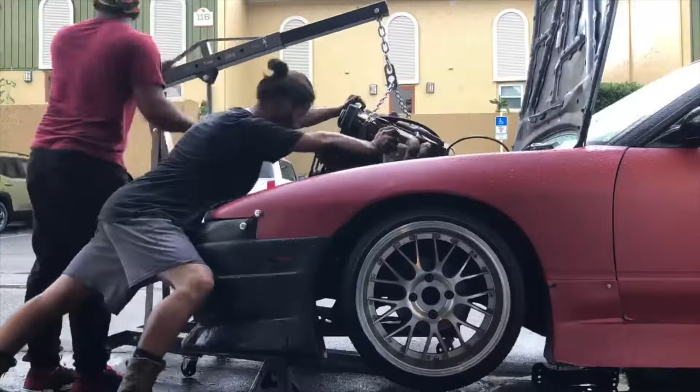You guys can tell the Jeep is behind me and we are at my shop, but I want to start the video off by apologizing again for the exposure issue in my last upload. I was filming a few clips on my iPhone, and for whatever reason it came out gnarly. That brightness was so weird, and it did it in my editing software, but I wasn't sure if it was just a rendering issue until I uploaded it and saw it was all janked up. So I apologize about that.

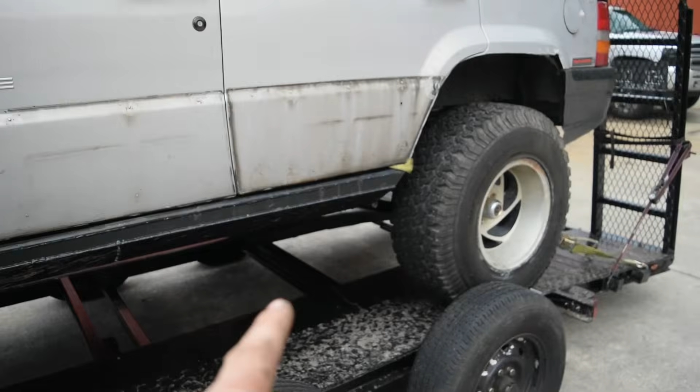I'm going to throw in a couple clips real quick of me working on the rock sliders for the Jeep. It's going to jump back to me at the house, and it won't have the tires on it, but I want to show the clips I filmed of me welding the rock slider plating on, and I went ahead and 45'd these edges. I traced out my cardboard template that I'm going to lay over these to cap the rock sliders. So it's going to jump to those clips real quick, then back to me in the shop where I'll show you guys the cutouts, transfer those to the computer, get them drawn up in CAD, and then get them cut on the table. Here's those clips real quick.

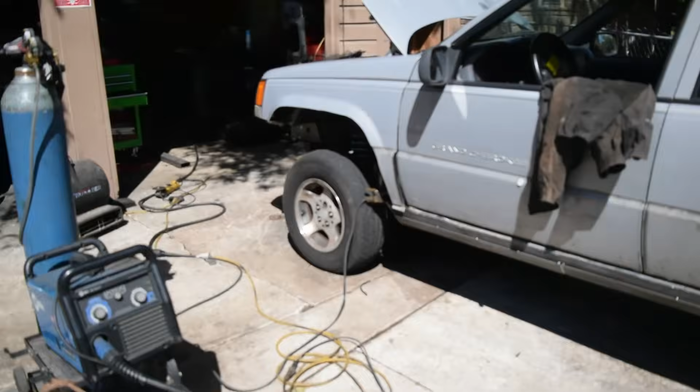Alright guys, we're back out here yet again working on the Jeep. We've got my girlfriend out here cleaning up all the camping stuff. We're prepping for Uwharrie. I know it's only about a month away, four weeks, but that time's going to fly right by, so we're doing all that we can. I wanted to bring this footage to you guys.

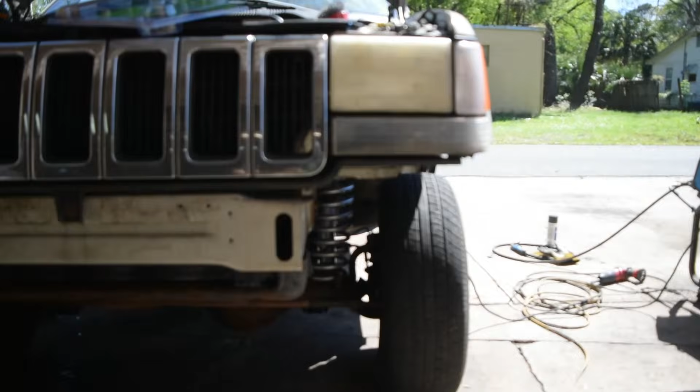These are the beauty plates, or the rock slider plates, that I'm doing for this build. I've got these all tacked up, and I wanted to check in with you guys and show you this process before I just started welding them out. I've also gone ahead and cut off this side of the Jeep, as you can see. We're going to need to remove that side, weld this stuff up, and then from there it'll be lightly sanding down everything, prepping it to lay down some black paint. I'll probably do the same body line up across the doors, and then paint it black from there on down.

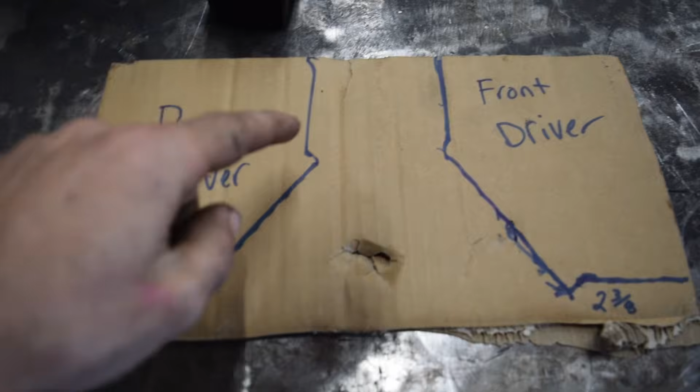I've got my cardboard templates behind me, let me show you guys real quick. These are for the driver's side. This is the rear cap, and then this is my front cap here. And I've got my measurements just marked out to calibrate my drawing in Fusion 360.

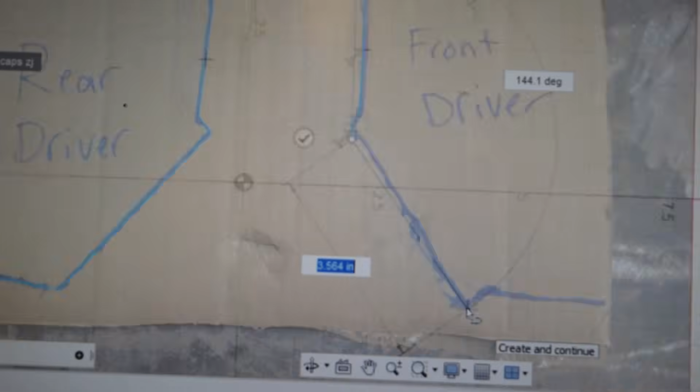There's a ton of videos and stuff online that will explain all of this to you, so I'm not really going to go into detail, I'm just showing you guys how I'm drawing these out. Essentially what I do is put this photo into Fusion 360, then calibrate the photo with a measurement I've taken on one of these cutouts or drawings, and then I simply trace it out in my program, which gives me two separate items, as you guys can see here.

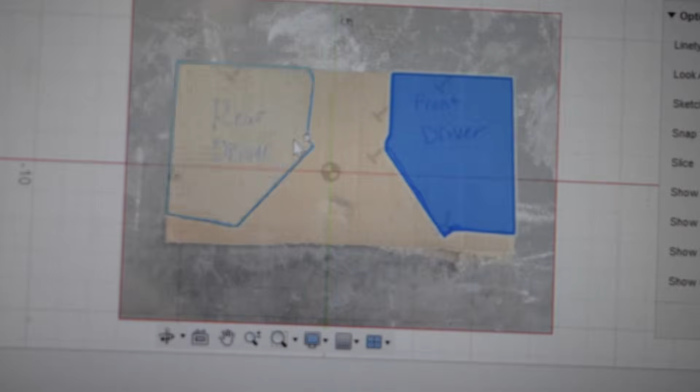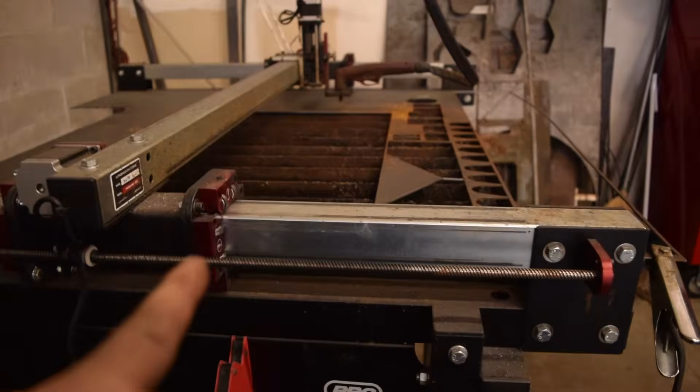So this will just make my life easier when I go to put this into SheetCAM, write my G code for it, and then put it out onto the table. Once it's out on the table and it's cut out, I can just grind to fit, and this just makes everything so much easier.

So I'm gonna finish out these guys. As you can see, they're almost done. I've got to go ahead and save the drawing, get it into SheetCAM, and do my contour lines. And once all of that's squared away, I can write my G code, and we will get to cutting this.

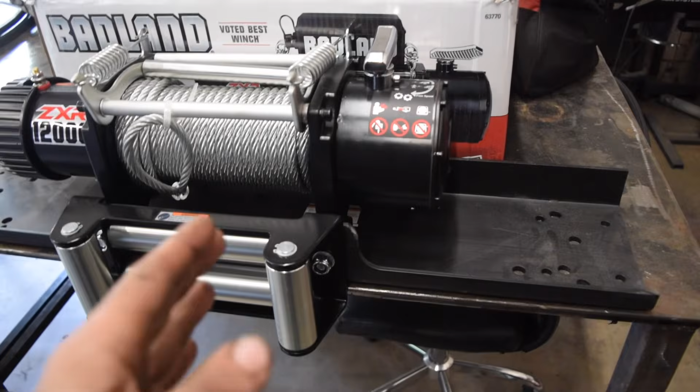And then from there, once we get these guys cut out, hopefully I'll have some time to start working on this. I really want to get the rock sliders capped off and then turn my attention to this, but I was really hoping to get something drawn up today and at least starting to cut material and getting it prepped up, because I want to take the Jeep home this weekend so that way I can continue doing the rest of the work. I also need to weld the diff this weekend because URE is literally like 2.5 weeks away. So I've got a lot to do in a short amount of time, so let's get to it.

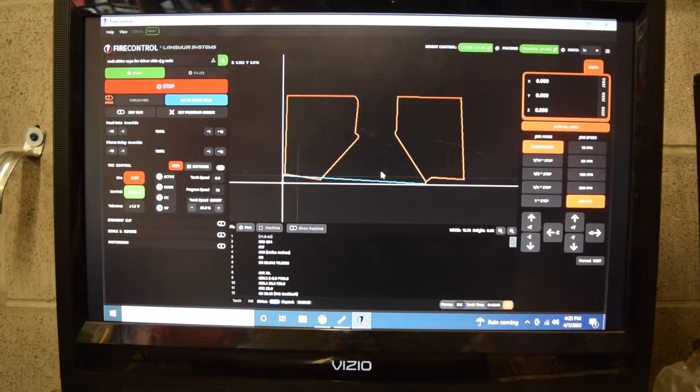Alright guys, so as you saw, we've got our drawings in FireControl now, and the table is ready to rip. I'm going to do a quick dry run real quick to make sure that my plate positioning is correct. So I've got her on dry run, and we're just checking on this first cut.

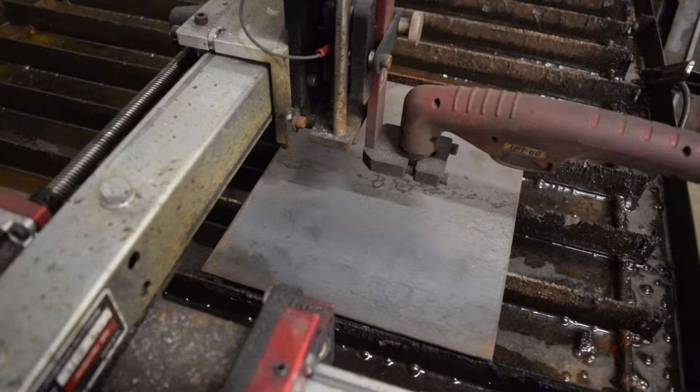Now I would let the second cut run, but since my plate is small, I'm going to stop it when it travels over to the second plate that it's supposed to cut, and I'm going to restart my G code at that point in time.

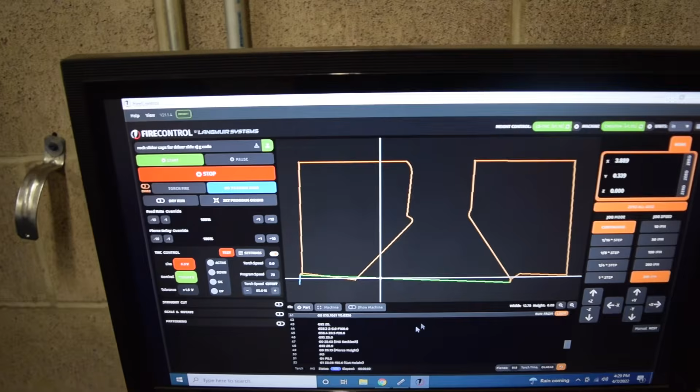So if I click here, it will give me the option, let me turn off my dry run, click here, it will give me the option to run from the line, or if I click here on my actual lead-in, you guys can see where she will start her cut. Right here, I can generate from that line, and now we are cutting just the second one by itself. And if I want to go back to it, I can just, whoop, there we go, both plates.

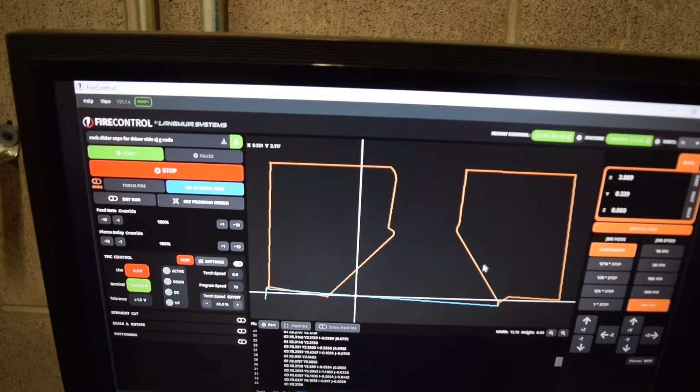So I'm going to rip out the first one real quick. I'll show you guys that one, and then we'll cut out the second one. And I don't think I'm going to be able to do any welding today because we have a storm moving in, and it's moving in quick. I was hoping I'd be able to get some work done, but what I may end up doing now is just cutting out the plates and then starting to draw up for the actual bumper itself.

I'm going to get my dimensions. I've already taken 2 photos of the frame rail, so I may draw those up in CAD. We may go through that process, and I'll make this a multi-part video. But let me shut up, let's get cutting real quick, and we'll move forward.

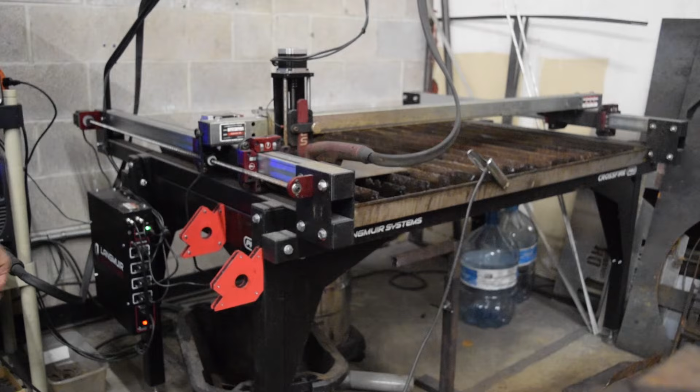Alright guys, so we are set up for the second cut. I'm going to go ahead and turn off the dry run feature. That's my torch height control system there, but we won't be using that right now because I'm not doing any in-depth cutting right now. We're just cutting a straightforward piece here, but we'll go ahead and hit the start button.

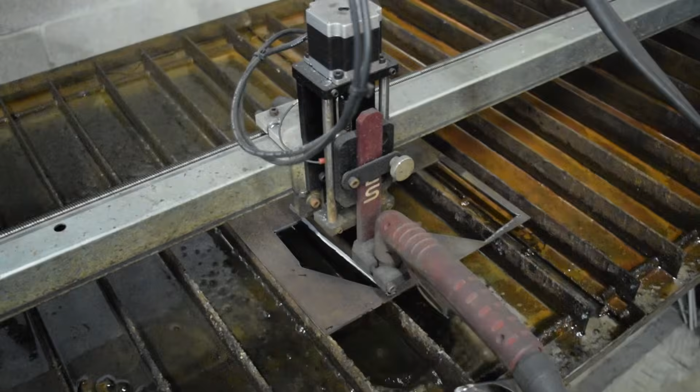Voila. Go ahead and close the program here. Move my torch head. Magnet. There we have it.

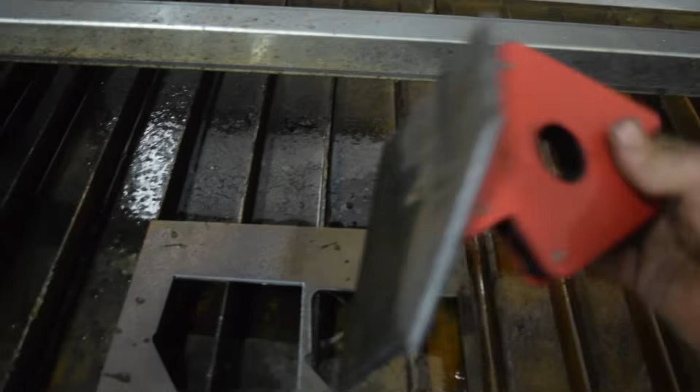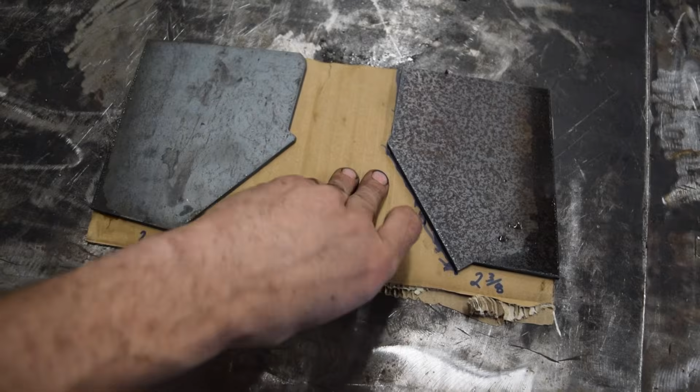Let that cool off for just one quick second before I go touching it, and I'll show you guys on the cardboard templates. Alright, as you guys can see, I've got them laid out on my cardboard template. If I just slide them down, we have my caps. I'm going to get these deburred and cleaned up, and then we will turn our attention to drawing the bumper plates on my CAD computer here.

Or excuse me, the frame rail plates for the bumper. Get those drawn up. I'll show you my process there, and we can try to get some plates cut out today for that.

Alright, so that storm definitely hit us good. While this is drying off, I'm not sure if I'm going to have time to do any work today aside from drawing and maybe doing some cutting on the table, but I'm going to have to do a lot of measuring on the Jeep.

Go ahead and set up for my CAD work. So my basic idea is on my phone here, you guys can see that I've emailed myself.

Sorry, the focus was terrible there. I'm not really good at doing this kind of stuff here. I'm trying to get better about this YouTube thing, dude. I'm so awful. Anyways, pull up Fusion 360.

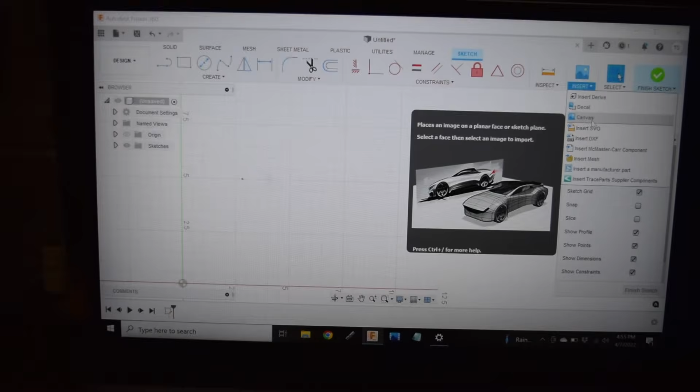I go ahead and insert a canvas, and I already have these photos emailed to me. So here is the driver side of the frame. Select that and move the photo over here, and I'll zoom in. It'll make more sense to you guys.

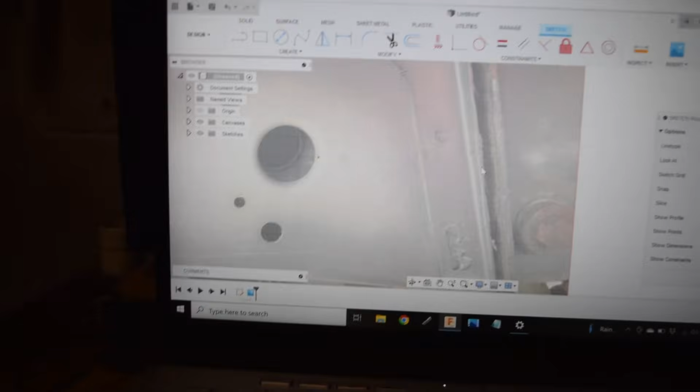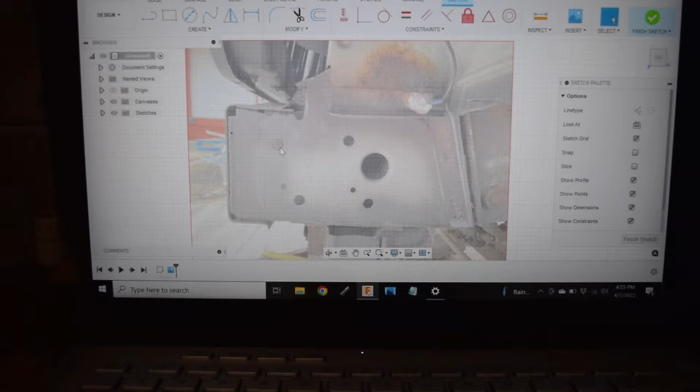So here is the side of my ZJ frame, and what we need to accomplish is making a plate that can sit here on the actual frame rail itself, or the unibody, and something that I can put a couple through bolts here on the chassis, maybe one here. I'm not quite sure what I'll do with that large hole, but I believe these guys are 1/2 inch, so I'll do some 5/8 holes or something on my plate, get some 1/2 inch hardware, slip them through, and then maybe do another plate on the back side with some nuts.

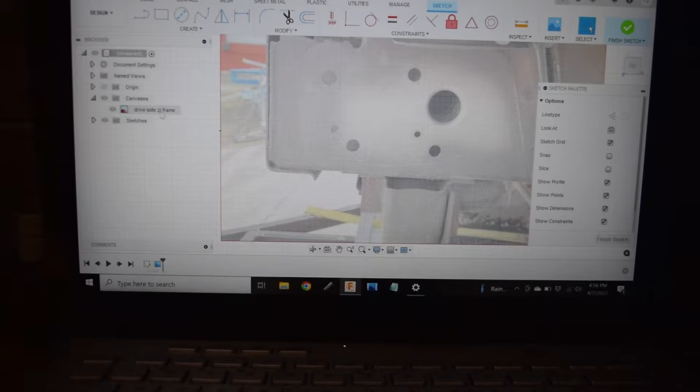I'm not going to show you guys this whole spiel here, but basically what I do is go to my canvas drop down menu, then go to calibrate, and this will allow me to go to, say, this hole. I believe the actual hole itself is 1/2 inch, so we'll put that in there and press enter, and then bam, our photo was just scaled off of that one measurement.

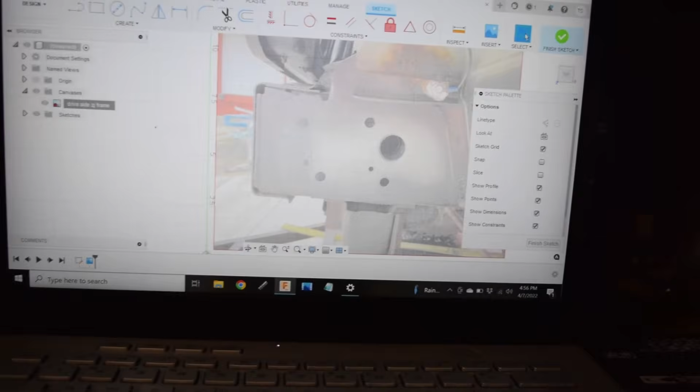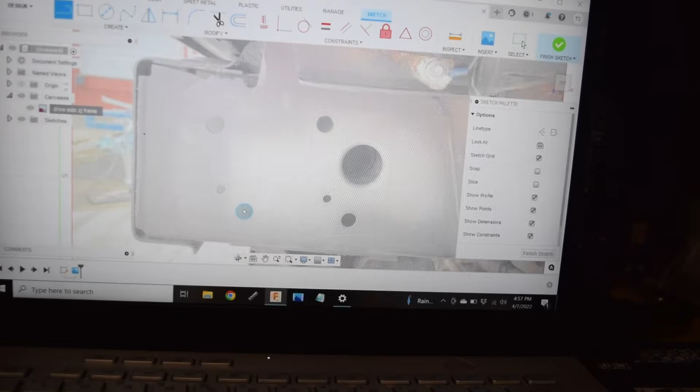So in theory, when I do create a 2-point circle and come down to that same hole, put the outside edge there and come down here, it should be - yep - 1/2 inch. So I go through and select all of those lines, those circles, and do a rough sketch. We'll say we want to meet back here, come down parallel with this guy, place this out, and we need to figure out from this distance here on the end how far I want to protrude and how I want to do a D-ring setup.

Now I'm probably going to be using some 1/4 inch plate to weld this bumper up, along with the actual winch plate that I bought at Harbor Freight. So with all of that, my 1/2 inch plate here, right behind my rack, and this guy should be able to make a decent little stubby bumper that I can mount this guy up to on the front of the Jeep, and will obviously enclose the front.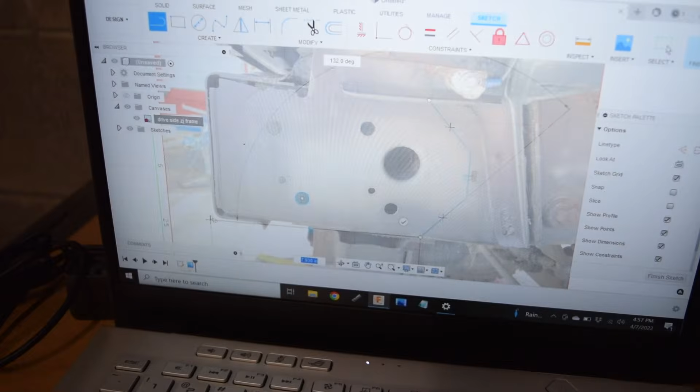Let me go show you the front of the Jeep real quick, and this will make a little bit more sense, but that is my basic idea on how I'm going to draw these frame plates. And then yeah, we'll step outside and I'll explain a little bit more in detail.

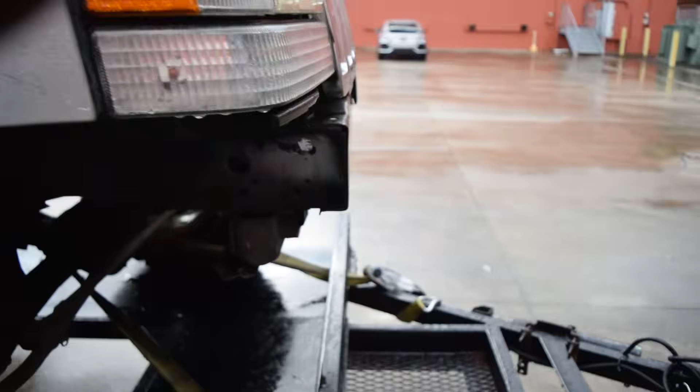Alright, now that we're outside, here's the ZJ. What I need to figure out now is how far I need to come out for the actual winch. So I'm going to go in there and measure the distance of that winch plate. That'll give me my overall measurement, a rough estimate, and then I want to come down and make a small curve to where I can mount 2 D-rings.

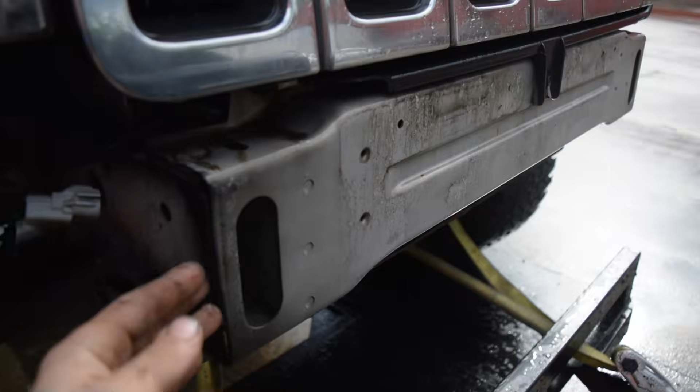Now I know the 1/4 inch plate, it's probably not the best idea to be pulling or tugging on there with small D-rings, but it's mainly just to hook up my winch, and if worst case scenario I need to be winched out, I can hook 2 straps to the front of it and connect to 1 winch cable, and then yeah, we could be good from there. But basically what I want to do is just come out the length of the actual winch plate, mount the winch right here in the front. Don't worry about cutting the grill or any of that nonsense.

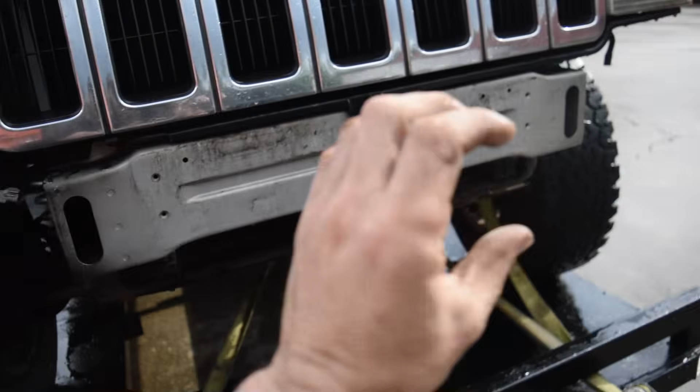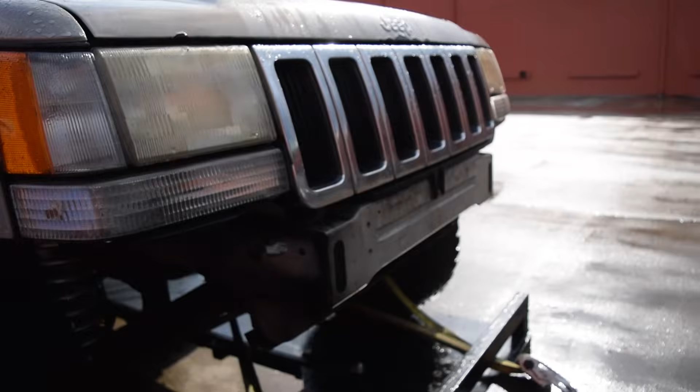I'll plate the front of it, have a fair lead right here, two D-rings on either side, and then with the bender inside the shop, I'll go ahead and bend up probably just a cheesy Schedule 40 or Schedule 80 stinger, because I don't have the money for DOM in the budget right now, and I want to be able to make it all the way up there.

Obviously I've got to fuel this thing for five dollars a gallon, absolutely trash, but there's my boss man. You out of here? Alrighty guys, so I apologize about that. That's my boss, he was trying to give me my paycheck, and we had to talk about a few things happening tomorrow, because I'm probably going up to Virginia Beach next week for a big contract and a meeting.

I had to work this past Sunday, so things have been kind of shambled, and I'm trying to fit all this stuff in before my trip. Anyways guys, enough rambling, let me talk to you about what I had planned, everything I was explaining outside on the Jeep. I'll run you through it real quick.

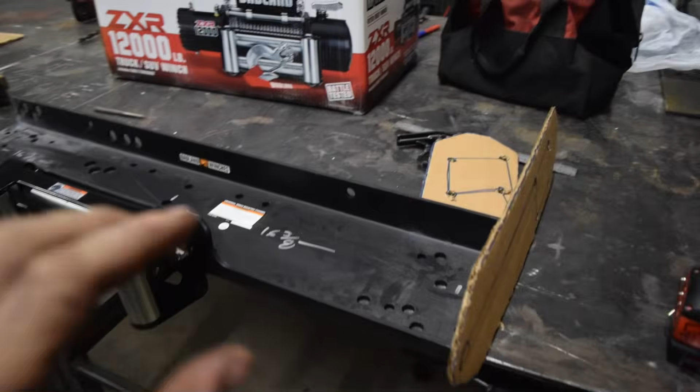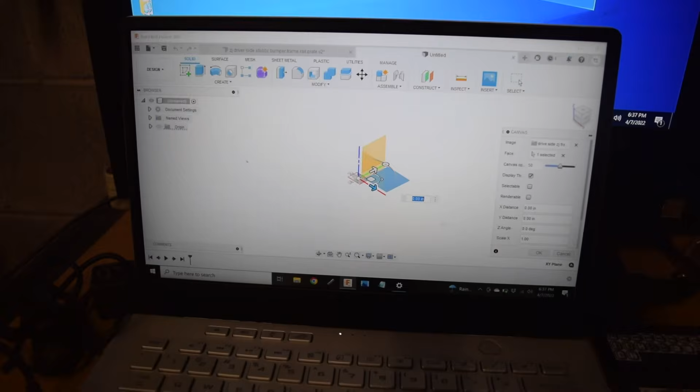This is a rough drawing that I have of a frame plate. All I did was take a photo of the inside of the actual chassis. I showed you guys earlier how I do my basic stuff with cardboard.

You can see here, adjust the scale here, go back to my origin, move this. So what I've done is taken this photo here, and drew out on the face of it this plate.

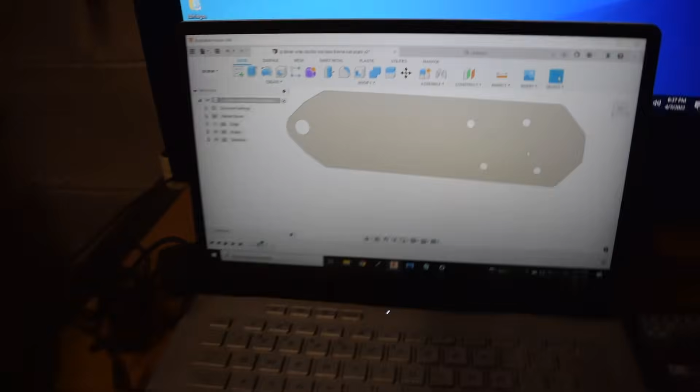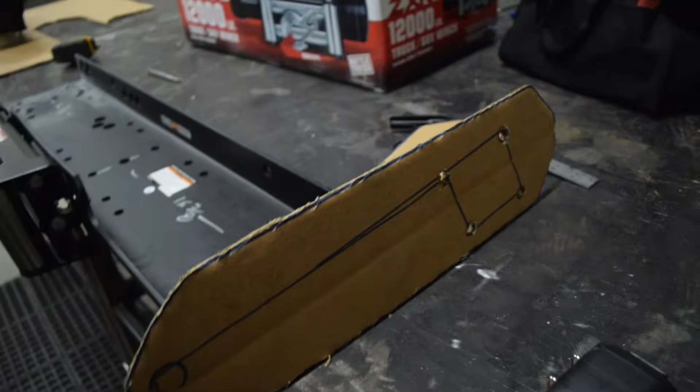From there I MacGyvered my torch head on my plasma table to do a drawing with a Sharpie, then cut those two out and laid them out right here. I fit this up against the outside of the unibody and it fits good, the holes line up. I'll have to trim along the top side a little bit, it rubs into a spot where it ties in, but this is the basic idea.

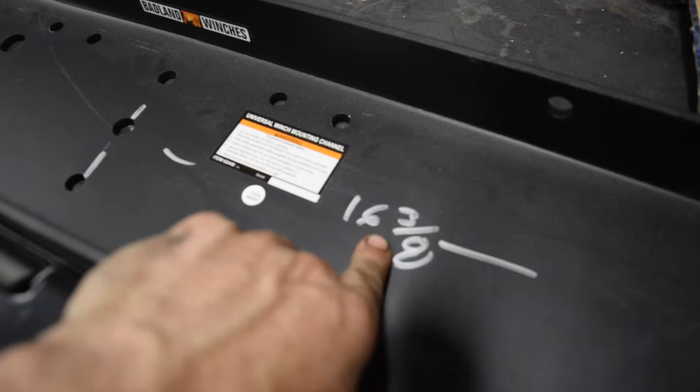This is the frame plate, or winch plate, the universal one from Harbor Freight. This guy will sit here, and you can see my measurement here, this is for the entire width of my Jeep, from this distance to this distance, that's the width of the Jeep. I split that difference up and scribed the line on center for this guy, that's where I'm going to be cutting. So just imagine that's cut off and this plate's sitting right here.

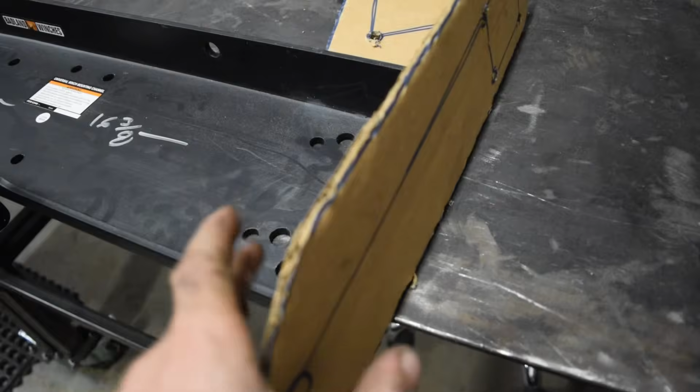This will sit roughly in that area. Obviously this is the face of the Jeep, the winch will sit here, this is the unirail of the Jeep. This plate I cut too big, I drew it too large in my drawing. Either I have to cut inside of the unirail to get this to fit, or I don't know, I may just weld this to my actual Jeep.

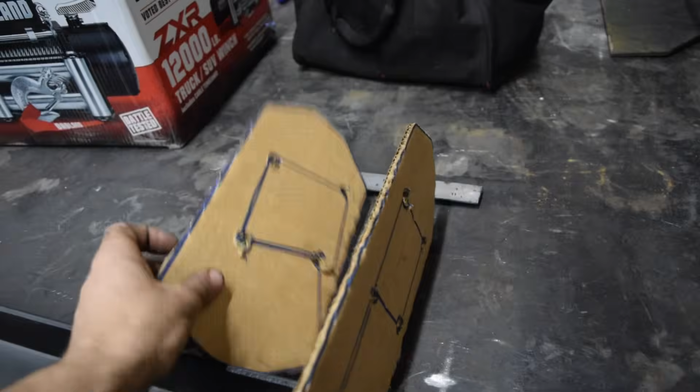I really want to get a kit made so I can put it on my website, and anybody watching this with a ZJ could just buy this winch plate at your local Harbor Freight and these two plates from me, something I could cut out and send to you that you can burn in yourself. Or this is something I can start producing in-house.

I can pick up a couple of these plates and weld these up for you guys, make up a jig and send them out. But either way, the inside of the unirail has a little slit, and this won't fit, so I need to trim this down and make a plate where this can bolt to, so it'll sandwich into the unirail. For mine though, I may just end up welding it, or I may get the kit figured out and go from there, but that's the idea of it. Once that's all squared away, that's what I want to do.

The rain's been on and off, the sun is back out there, but I'm not sure if I want to go back out, drag the welder and all my extension cords, and then have it rain again. So I know I'm rambling and talking a lot, but I'm just trying to come up with the content here to show you guys what's happening with the Jeep.

Let me show you guys real quick on the Fusion 360. Actually, let me just step outside real quick, one second.

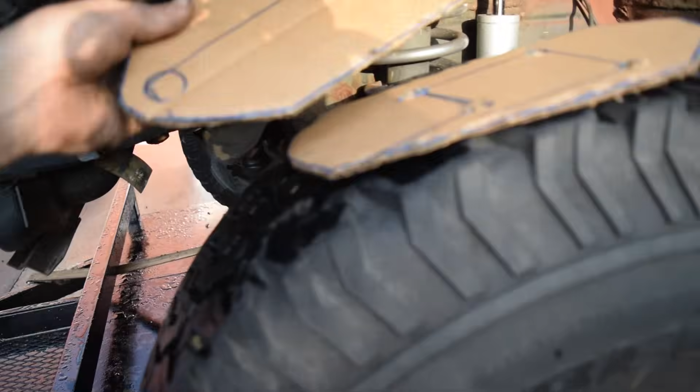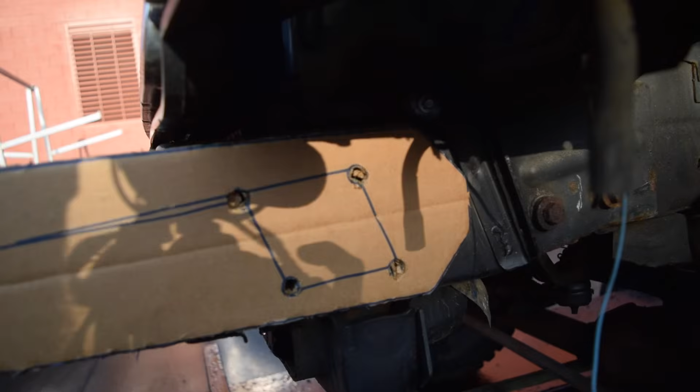Okay, so we're back outside with the Jeep. This will make a little more sense for some of you guys here. Obviously this would be sitting in these 4 holes right there. See that weld right there, or this overlay where the 2 panels meet? This is why I have to trim this upper plate down. So just think of it as that not being there. The holes are all lined up there. This guy will protrude there. The D-ring will be hanging where my thumb is, and then the winch plate will sit in here, and I'll probably bolt the back side of the winch plate.

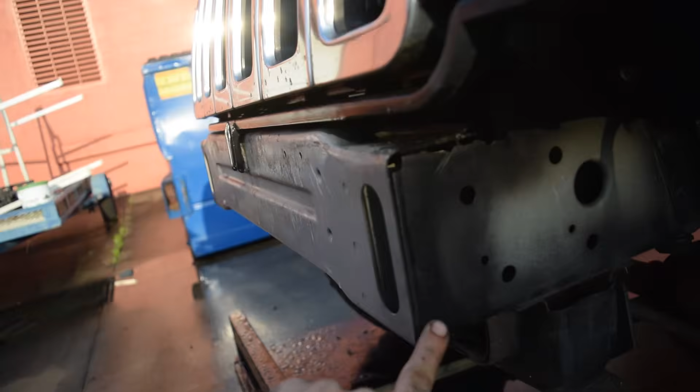In my case, I'm probably going to weld it, to be 100% honest with you. But if I make it a kit, I'll make it so that you can bolt it to the back side. I don't know if I'm going to be able to make any plates for back there, but you could rivnut that and then place a couple tack welds if you wanted to. I don't know how I feel about these 4 bolts holding my winch. Even though they'll be plated through here, all of this will be welded up, and the plate will be over it. I think I'm just going to stick it on here and burn it in myself as is, and make it so the winch is removable, with a small V plate on the face of it, like a rock or skid plate, whatever you want to call it.

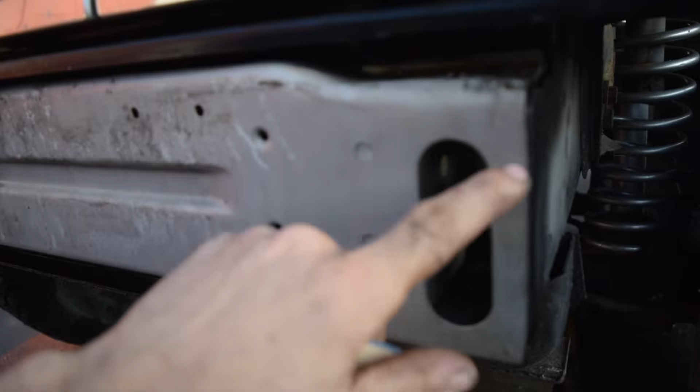But this is the inside piece that I was talking about. Either I have to cut this open larger right here to get this to fit, or I'm gonna have to make this bracket smaller. But the idea of it was it's supposed to sit down right here, and that was gonna be the sandwich plate that bolts everything together.

So that was my game plan, and I know I'm running my mouth, but I wanted to show you guys that. Hopefully the rain's cleared off, so I may pull out the welder, back this thing up, and at least weld these up. These are what the other plates are cut for.

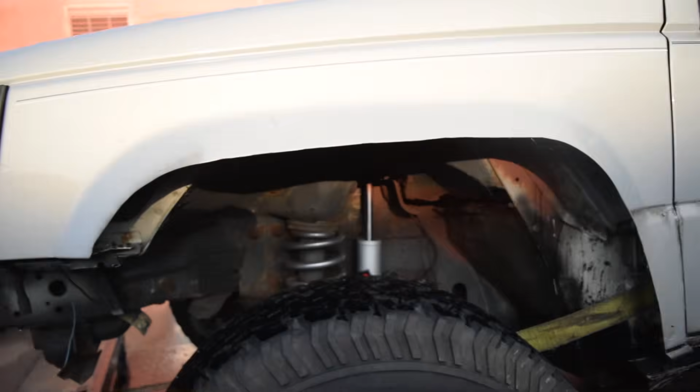Get those burned in there and get those welded into the chassis. I don't know, it's all wet, I may just cut these pieces out and do this all at the house. I don't know. All right, give me a couple minutes. Let me figure out what I want to do, and then we'll go from there.

Okay guys, so I pulled the Jeep up, and I think I figured out what I'm gonna go ahead and do. After playing with this guy, test fitting this, I'm gonna go ahead and redraw my bumper mounting plate, the little cardboard piece that I have sitting over here on my CNC table. I'm gonna redraw that guy to fit inside of that pinch weld.

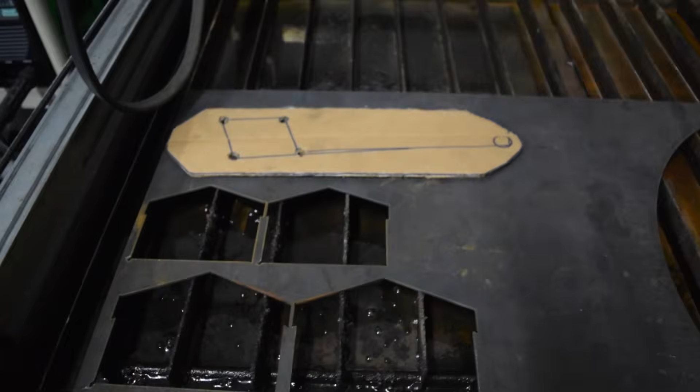You guys can see here, I've just got a new little layout real quick, just kind of messing with it to show you guys an example. I'm gonna pull up this file that I saved and try to shrink it down a little bit, and then go ahead and rip it out of this 1/8 inch plate and see how it fits up. And if it fits up nicely, I think I may go ahead and rip it out of the 1/4 inch, 2 plates of them, and then fit that up.

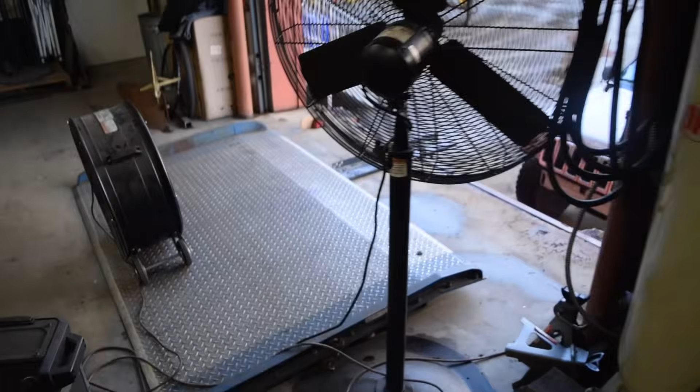And then I can take my winch plate that's laying over here, cut that down in the big bandsaw that's hiding next to Mr. Bear over there. I get the bandsaw out and cut that guy down, and then I may be able to just roll the welder over here to the edge of the dock and disconnect my battery and tack that up, and then sit the winch down in it and see how it fits. That may be my game plan.

I don't know if I'm gonna have enough sunlight, but either way, this is what we're gonna end up doing. Whether it becomes a 1, 2, or 3-part video, that's what I'll end up doing. So let me set you guys on a time lapse real quick. I'm gonna redraw this, or at least redo my first drawing, my first version, and then from there I'll rip one out and see how it fits up, and then we'll go from there.